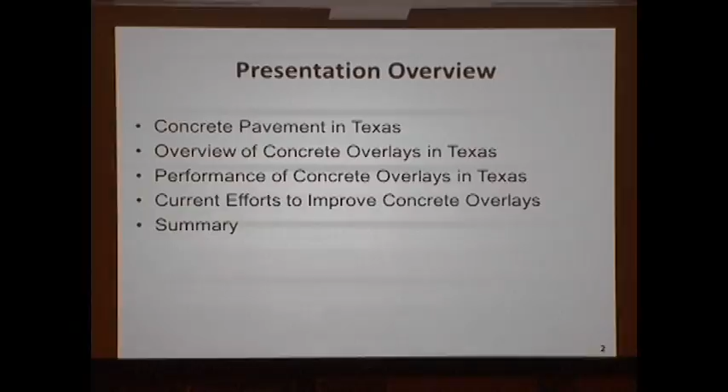This morning, for the next 30 minutes, I will discuss concrete overlays in Texas. We will discuss concrete pavement in general in Texas, then the history of concrete overlays, and look at some good and not so good performance of concrete overlays in Texas. Right now there's a research project going on, and we will discuss what we are doing.

This is the lane mileage of concrete pavement in Texas from 1994. PMIS has data from 1993. This blue line shows the lane mileage of CRCP, and this red one shows the CPCD. As you can see, there has been a steady increase in CRCP mileage. Right now we have over 12,000 lane miles.

That's the most CRCP, actually concrete pavement mileage in the nation. But what we can see here is that as of 1994, we had around 4,000 lane miles of CRCP and around 300 lane miles of CPCD. So as of now, we can say that at least 4,000 lane miles of CRCP are at least 22 years old, and some of them are very old.

Up to this point, we spent lots of research money and effort to improve pavement designs for new construction. If you look at the specifications, we have item 360, again for new concrete pavement, but we don't have any standard spec items for concrete overlays. We don't have those yet. So again, we spend lots of effort to improve new construction. But now, since we already have this many lane miles, I think it's time to really pay attention to figure out what to do with all this aging concrete pavement.

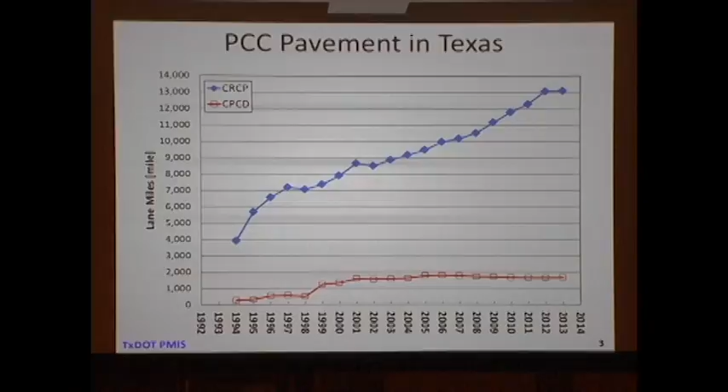So I think the concrete overlay provides a really good, cost-effective solution to managing all the infrastructure we have.

Right now, this is from the CP Tech Center from Iowa State. These are the general guidelines on what kind of concrete overlay type we have to select. But the problem is their criteria is the existing pavement condition before treatment.

So they provide options - for example, if the concrete pavement is in good condition, we can have a bonded concrete overlay. If it's fair or poor condition, then we can put an unbonded overlay. But the problem is, what constitutes good condition and what constitutes fair condition? As a design engineer, it will be difficult to really get good information to say, in my opinion, this pavement is in fair condition, so we have to use an unbonded overlay, that kind of thing.

So they provided this guidance in terms of qualitative type information. We needed more quantitative type information, so we are working on it right now. What we are doing is trying to evaluate the pavement condition in terms of deflections. If the deflection is this much, then you can put a bonded overlay. If the deflection is more than this, then you have to use an unbonded overlay. That's what we are working on right now.

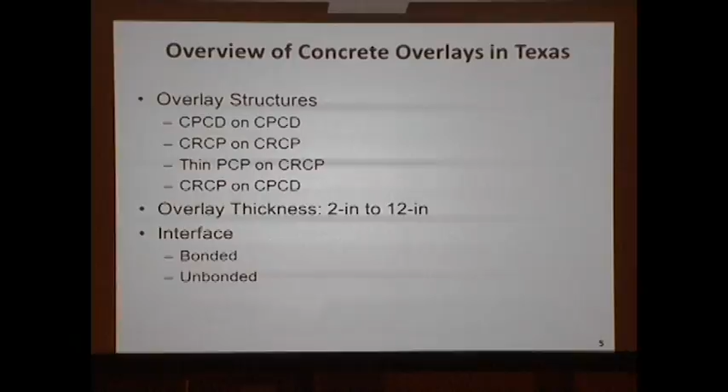And we also put the interlayer or no interlayer - that means bonded or unbonded. That's the big picture of what we have in Texas. We have actually more overlay projects than this one, but I want to discuss each project briefly.

The first one we built in Texas is the one on Loop 610 South in Houston. That was built in 1983, just east of I-45. So that's 33 years old as of today, under lots of traffic. The performance has been, to me, very good.

Then we had a 4-inch BCO on Loop 610 North between Ella and I-45, built in 1986. Actually, the performance has been really excellent.

But they had to reconstruct the Loop 610 North and US 290 area, so they had to replace the whole thing over there in 2013 or 14. So they provided almost 30 years of good performance, excellent performance.

Then in 1988, Dallas District built 11-inch CPCD on 10-inch CPCD. The performance has been satisfactory. Also in 1990, Dallas District again put the 10-inch CPCD on 10-inch CPCD, that's unbonded, excellent performance. And in 1994, Beaumont District put the 12-inch CPCD on 10-inch CPCD.

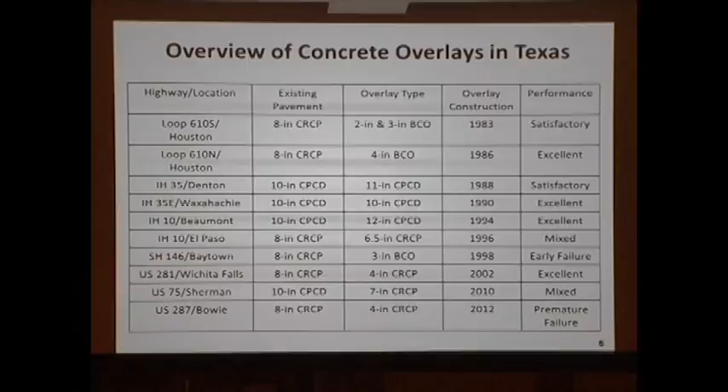Then in 2010, on US 75, we put 7-inch CRCP on 10-inch CPCD. We will discuss in more detail later on. And in 2012, again in Wichita Falls, they placed 4-inch CRCP over 8-inch CRCP. Then we had some problems. So we are getting some good information as to what happened. Among those, we'll just take a look at these 7 projects in more detail.

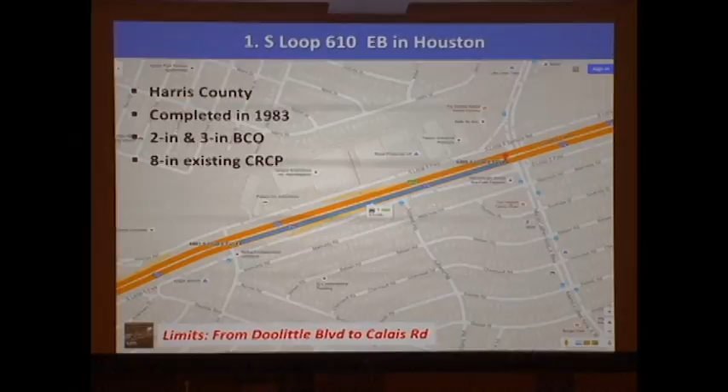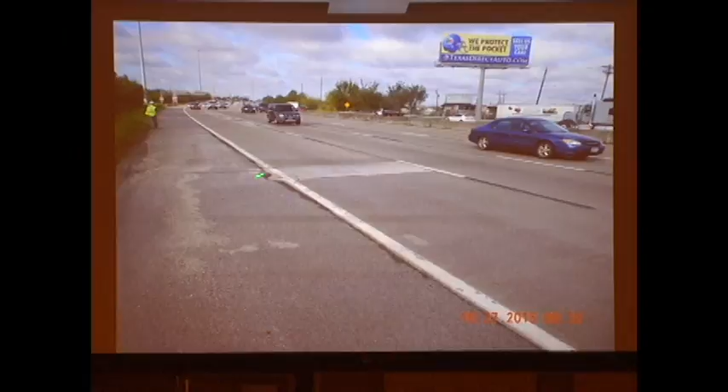This is Loop 610 South, again completed in 1983. And this is the picture we took last year. It looks pretty great after more than 30 years, even though there are some failures at the joint area and one repair over here. Other than that, it's been performing great.

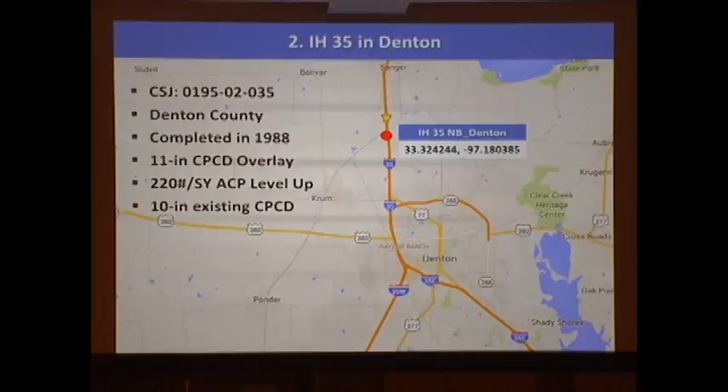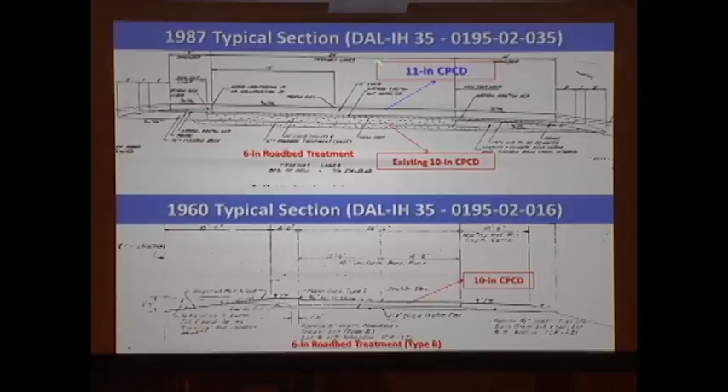And I-35 in Denton, they placed 11-inch CPCD overlay on 10-inch CPCD. This is a 1960s typical section. That's what they did, 10-inch CPCD, then they put 11-inch CPCD, and the interlayer was 2-inch asphalt. So overall, the performance, the condition is pretty great.

Actually, this is the same joint, as you can see, same joint. We looked at this one in 2012, March, and this year, February, so 4 years. Actually, they still remain the same, except that they had to put some more asphalt over here.

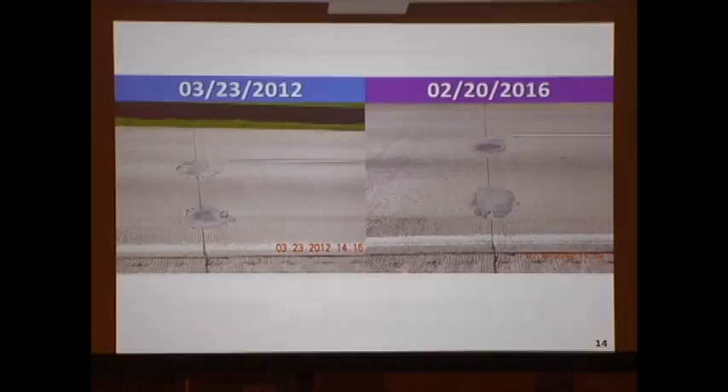So we took some concrete cores to see what's going on over here. It looks like, again, it's all speculation, but it looks like they saw cut maybe too early, that there was some micro damage in the concrete. Looks that way. So we did deflection testing.

Now this is the slab thickness versus average deflection statewide. So we went all around the state, then we measured the deflections with CRCP with the different thicknesses. So 0.8 mils, that is very, very low. That's actually smaller than even the deflections for 15-inch concrete pavement. So from a structural standpoint, this section is excellent. In other words, I'm not so sure whether really we had to put 10-inch unbonded concrete overlay. That seems to be a little bit over-designed. So we are working on improving design procedure as well.

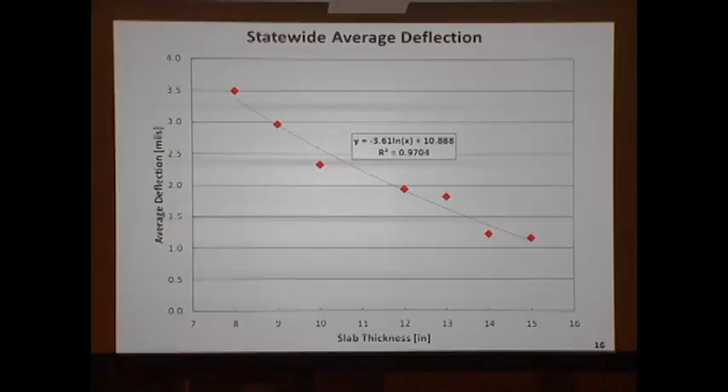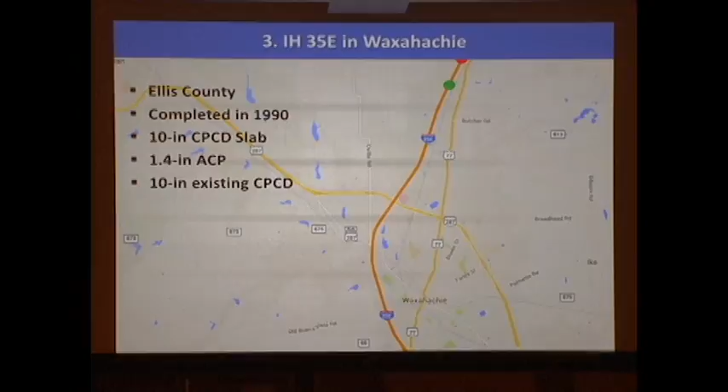Now this one, I-35 East in Waxahachie, again that was built in 1990. So you got 10/10 with 1.4 inch ACP in between. Also, this is part of the LTPP database. Actually, this section is in great condition for the last 26 years. Really great. Again, we did the FWD.

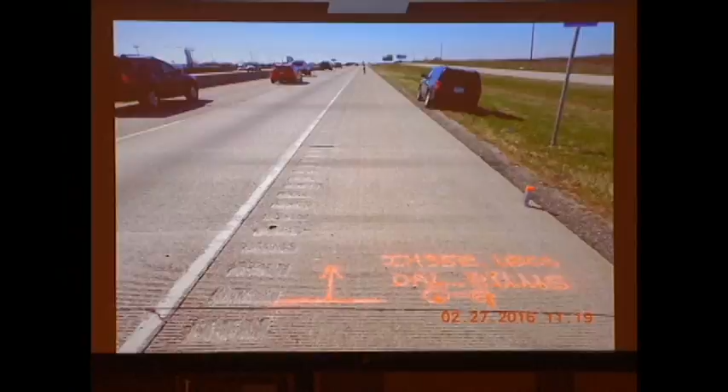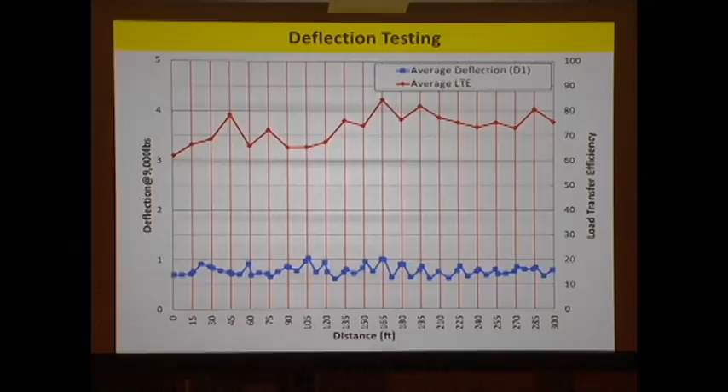The deflections are also pretty small, which is an indication of a little bit over-design, but still pretty good. The only problem we saw was at this joint, where there was some cracking going on, so we took a core right there to find out what happened.

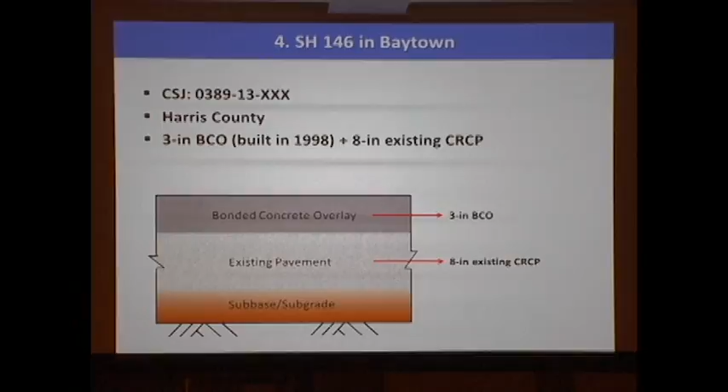Now, the section on State Highway 146 in Baytown, 8-inch CRCP and 3-inch bonded concrete overlay. Yeah, we have problems. But most overlay projects in Texas have been part of research projects, and this one was not. So we don't really have good information regarding the condition of the existing pavement, what materials they used, or what construction sequence they followed for the overlay. I was just asked to evaluate what's going on, so I was involved, and the primary mechanism of distress was delamination.

So since then, TxDOT Houston District placed an asphalt overlay.

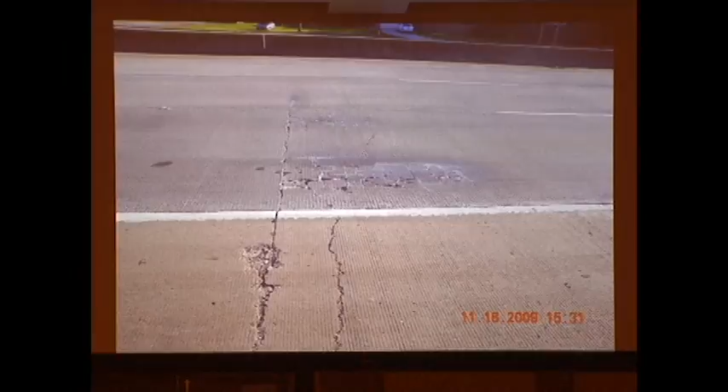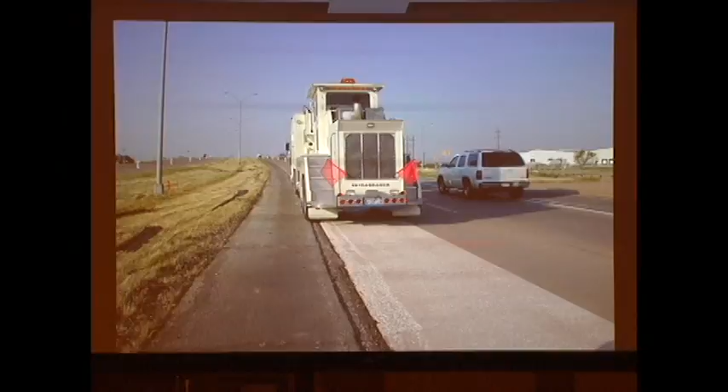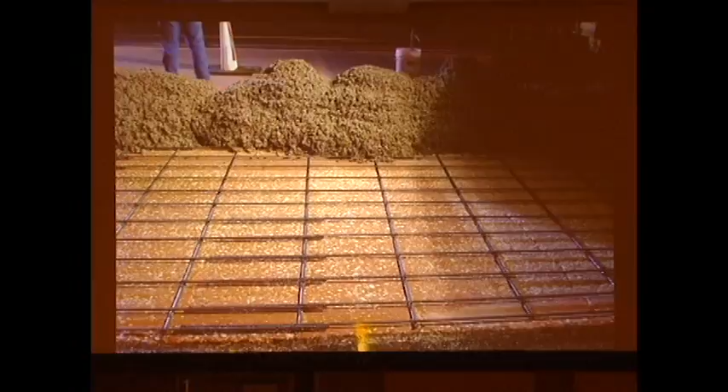Now, US 281 in Wichita Falls, in June 2002, a 4-inch bonded overlay. They used a Skidabrader for the prep of the existing pavement surface. This is a close-up view of the texture after Skidabrading. They placed concrete at night. At that time there was some controversy about whether to keep the existing surface wet or dry. We chose to keep the surface in an SSD condition, and it looks like that was a good decision.

Also at the time, there was some discussion about whether we could place steel this way. Some people expressed concerns that maybe the longitudinal steel was too close to the existing surface. But when we ran the bond testing, it looks like it's still good.

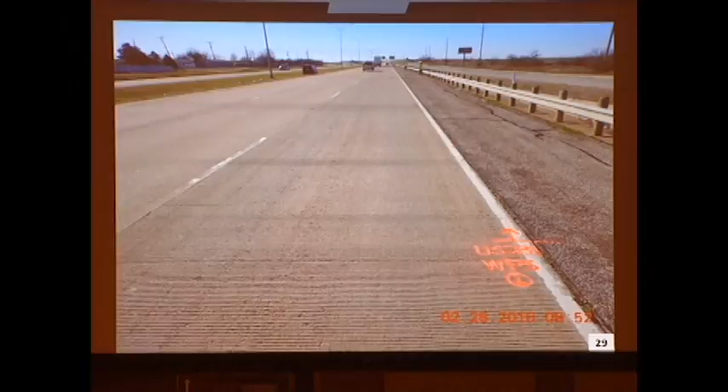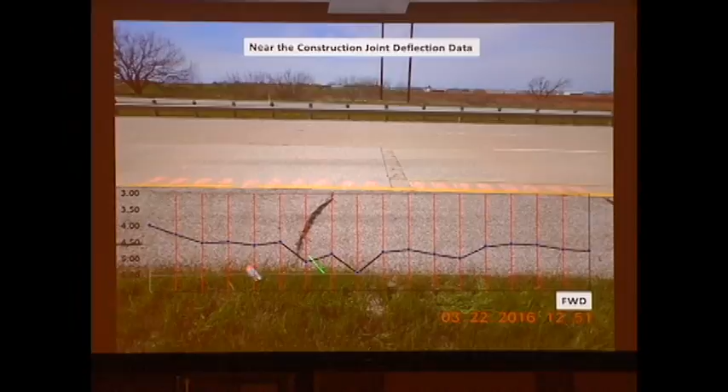In general, it's in excellent condition, except for a distress at the construction joint over here. So we did the FWD testing along this, and also MIRA testing, which shows what's going on inside the concrete. At this location, at 4 inches, the interface, we have delamination. Not only that, around 10 inches there's delamination going on in the existing concrete pavement as well, so the old pavement was not in great condition.

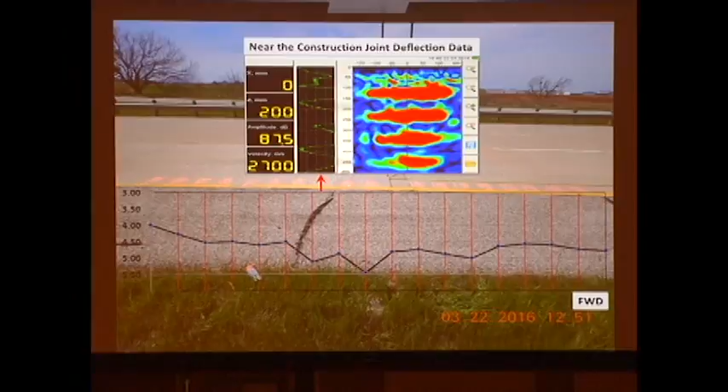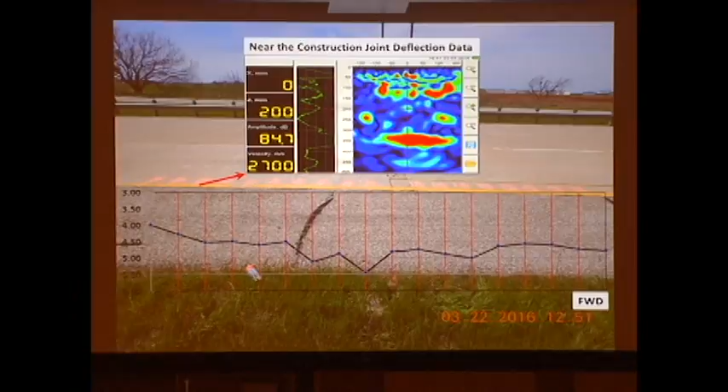Then we have this kind of problem. So we moved and did the MIRA testing again, and once you go over here, we don't have delamination—this is still in the old concrete pavement. So that's the only distress we have, except for some problems at the bridge interface locations.

So we will again improve the specifications. Now this is the CRCP overlay on CPCD.

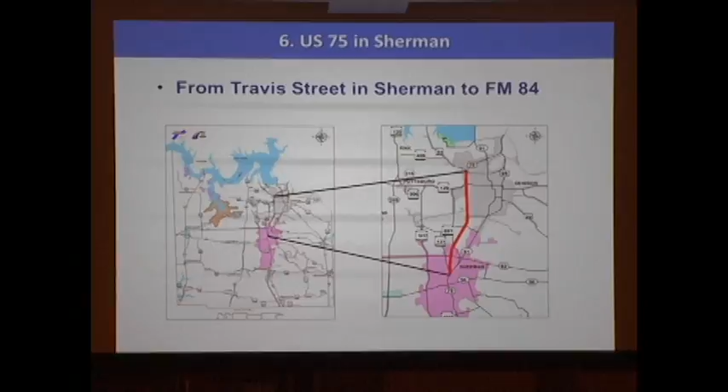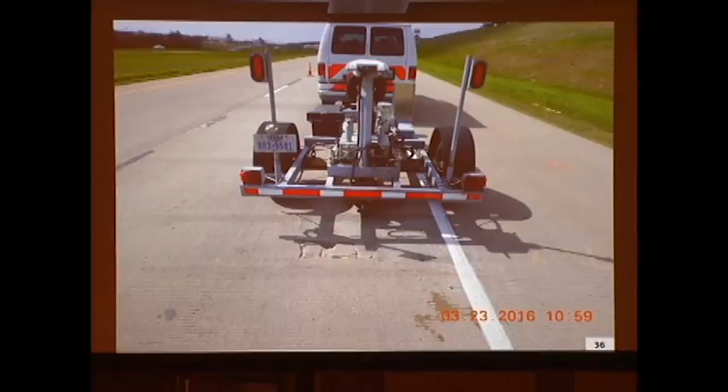We did that in 2010. What happened was that the CPCD on this US 75 was in very poor condition—they had lots of problems. Noel was the project engineer on this one. So what we did was select the section that was in the poorest condition, to see whether this 7-inch CRCP-type system works. From a researcher's standpoint, we want to see some failures, because then we learn something so we can improve.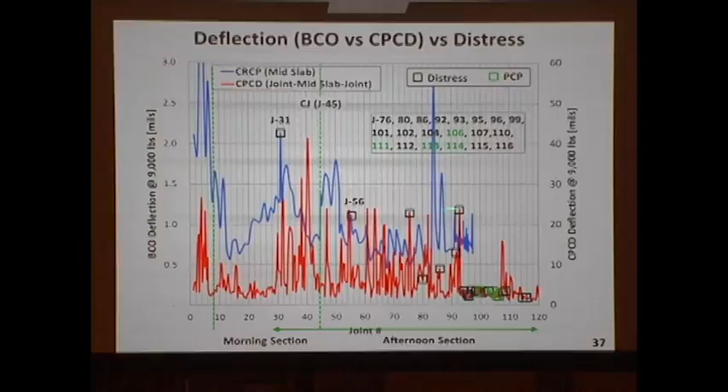However, we found out that from joint 0 all the way to 120, the distresses in the overlay actually increased this way. These are the maps of the CPCD condition before we put overlay. What happened is that when we have these cracks in the CPCD, we have to repair those before we put the bonded overlay. Otherwise, we will have this kind of distresses.

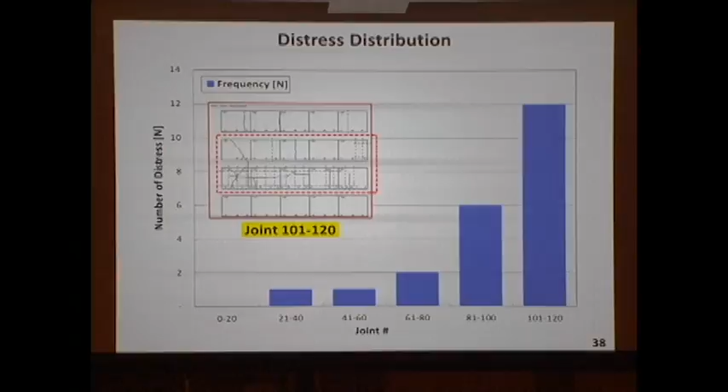That's what we learned. So now we have joint 110. Over here, we have a problem. Joint 111, this area, they already repaired it.

Now, US 287 in Bowie, the original pavement was built in 1972. Then the overlay was done in 2012. So actually this pavement provided 40 years of service. I'm sure the design life was 20 years. But later on we had some problems, so they put the asphalt overlay over there.

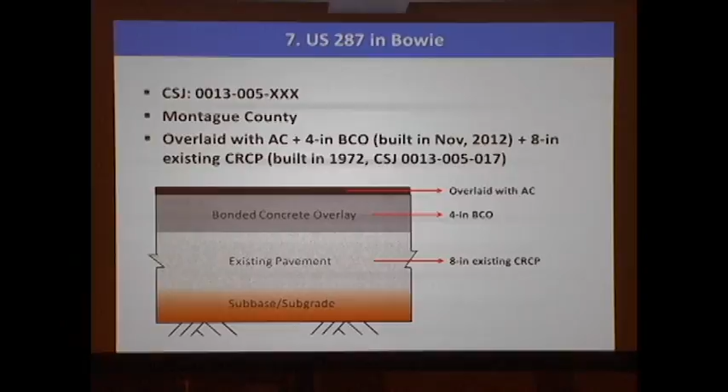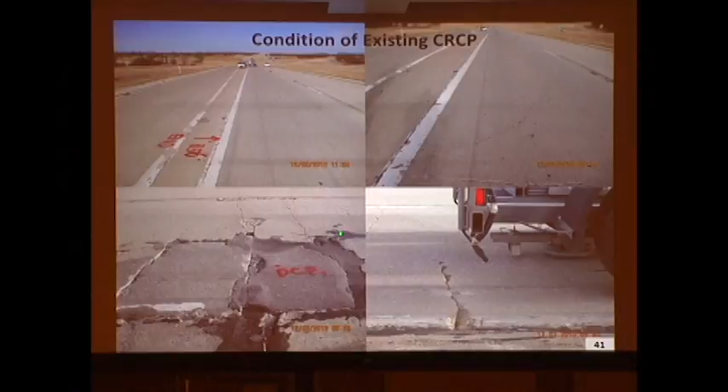So this is the condition of the existing CRCP, again 40 years old. There are some areas with lots of problems.

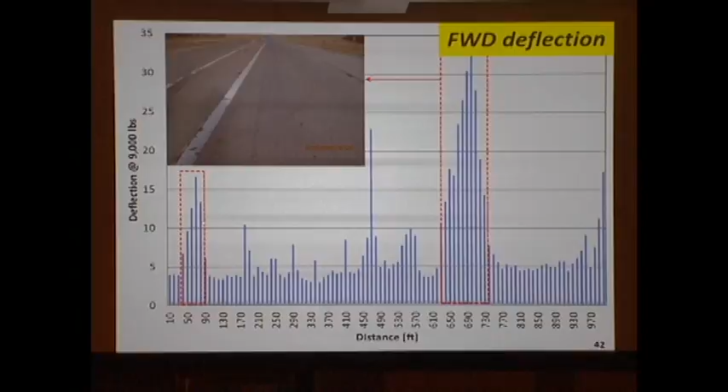So we did the FWD testing. Again, as you remember, this is the 8-inch CRCP, so we expect around 3.5 mils of deflections. But as you can see, in some areas we have even more than 30 mils of deflections. Very weak area here.

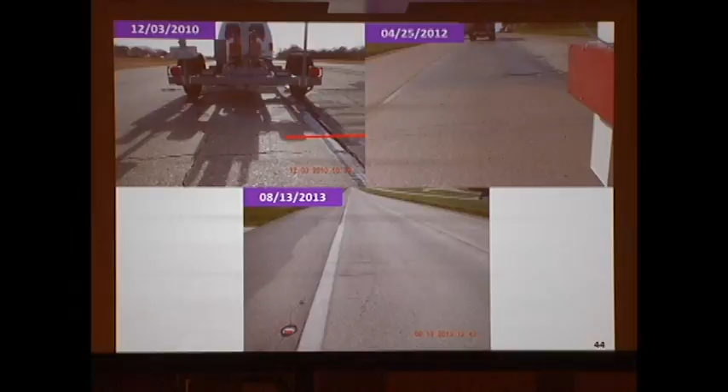So what we are doing right now is to get some correlation between the deflections in the existing CRCP and the condition of the overlays, to get some threshold value of the deflections for the overlays. And then we did some bonding testing as well.

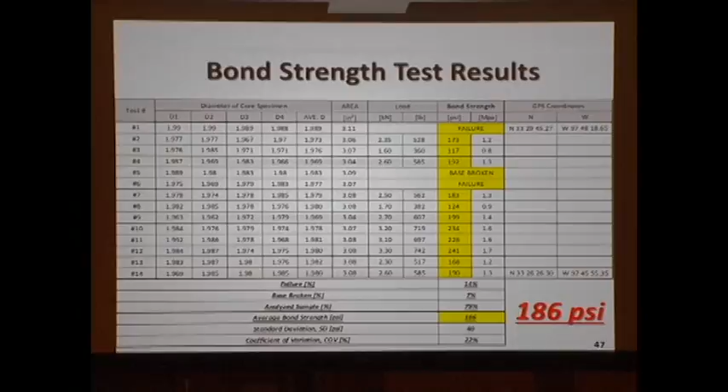So bonding was pretty okay, 186 PSI, but we still have problems, these kind of problems. So we are getting some good correlation between the existing condition of the CRCP deflections versus what happened in the overlaid section.

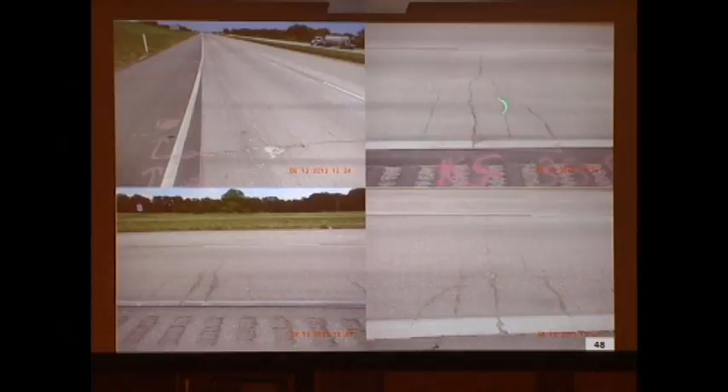So right now we have a research project, 6910. We are analyzing all this data to understand what works and what doesn't. What happened is that...

Texas DOT doesn't quit, right? Say, for example, Illinois DOT, they tried some overlays, only 2 or 3 projects. They saw some problems and they stopped. They are not doing it at all. The CRCP, the same thing. Many states in the past, in the 1950s and 60s, they tried CRCP, then they didn't like all those cracks. They stopped, like South Carolina, even California, and all those.

But Texas never did, right? We kept working on it. Actually, the credit goes to the late Dr. McCullough. And so now Texas knows how to build the CRCP.

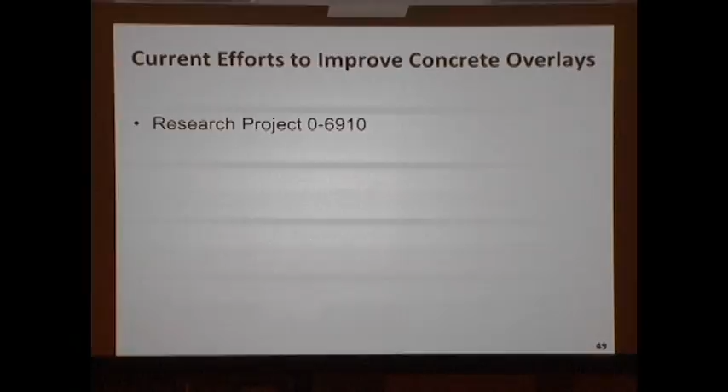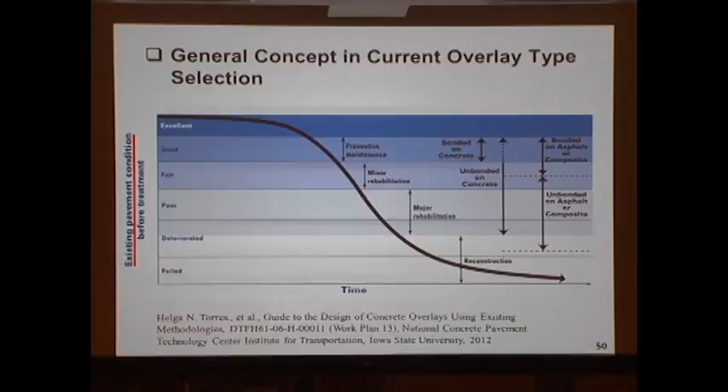And the same thing over here, we have a wealth of information on overlays, what works, what doesn't. So we hope that we will be able to come up with guidelines, not in terms of qualitative assessment, but quantitative, right? Like a TPAD, FWD, then you can tell, you know, look, we can do this, or we should do this, okay, that kind of thing.

And also, we are trying to develop the threshold values for deflections for PCC unbonded overlay, and also we are working on improving the overlay design procedures.

Right now we are using AASHTO. So we are really getting into how that procedure was developed, and there's no good technical background really. I mean, the report says that they are not so sure where that concept came from. That's what they are saying. The bottom line is that the current AASHTO UBCO procedure is very conservative, okay? Very conservative. It gives very small credit to the support condition for the existing pavement. So we are improving that design procedure.

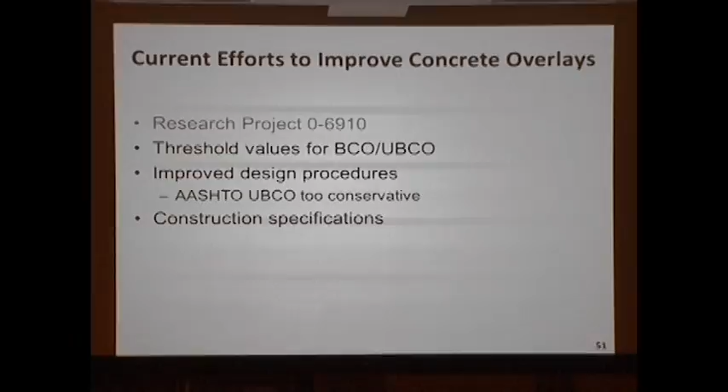As discussed, we don't have standard construction specifications as well, so we are actually developing them. Right now we have special specifications, but we are improving the special specifications, and we hope that by 2014, TxDOT will have standard specifications for overlays.

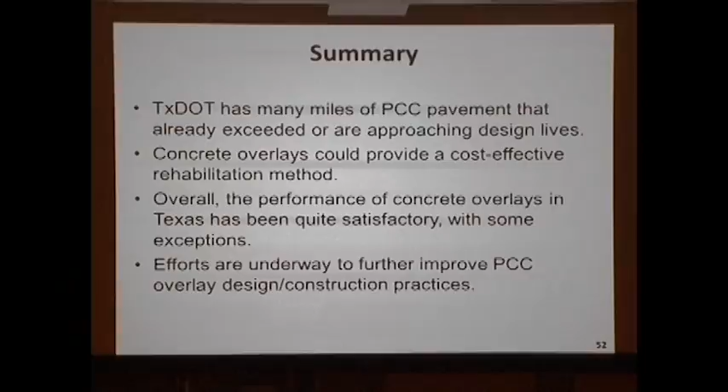So in summary, TxDOT has many miles of PCC pavement that already exceeded, or are approaching, the 30-year design lives. Concrete overlays could provide a cost-effective rehab method. The performance of concrete overlays in Texas has been quite satisfactory with some exceptions. Again, we learn a lot from those exceptions. When we fail, we learn something, right? So that's a good thing. And currently, efforts are underway to further improve PCC overlay design and construction material specifications.